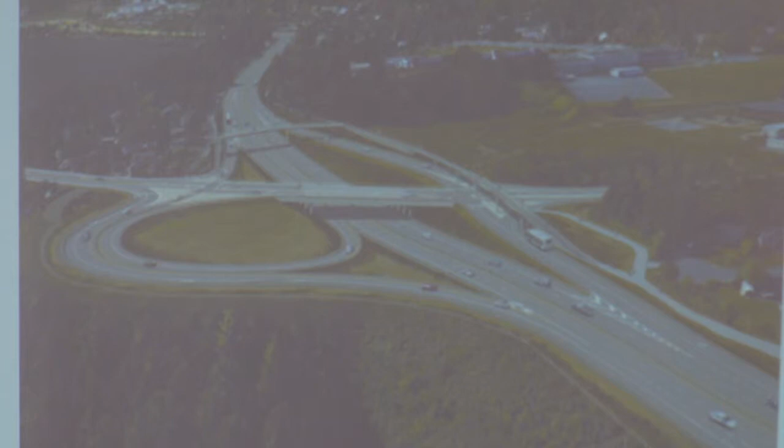So traffic wanting to come down the highway and get onto Mackenzie can come off, can loop around, and head up the peninsula. The difference in this option is folks don't actually need to stop at a traffic signal, wait for a green light, and make that left turn.

From an operational perspective, our team certainly showed from a traffic modeling perspective that both options operate well for that left turn movement. The difference in this option is it's one less light for people coming down the highway heading up the peninsula. So that was sort of a differentiation between the two options.

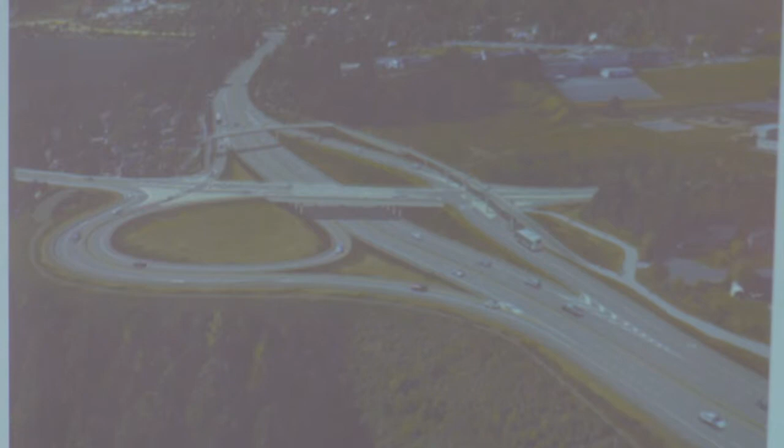And the impact of this option is it does have a bigger footprint on Cuthbert Holmes Park. In this option as well, the Trans-Canada Highway is going under, with Mackenzie and Admiral staying at that same sort of grade that you would see today. So essentially just a structure bridging those two roads.

So our third option was a tight diamond interchange as well, looking at the opportunity for the highway to go over. When we came to our open house in November, our team was still doing geotechnical evaluations, trying to figure out what's feasible, what we can build, how quickly we can build it, and what it means from a preload perspective.

Some of the impacts from this option: it could be visually more attractive to folks, or less attractive, depending on your perspective. The noise implications from something a little bit higher may have a more compounding impact on folks in the community. But it was another option our team was exploring, making sure we could come up with a constructible option from a technical perspective.

To get to our open house in November, and as we continue along the way, there's been a lot of consultation. We know this project is important to the community in the Capital Regional District, and we know folks have a lot of good ideas out there. We're getting great feedback that we're able to incorporate and weave into the progress, really helping refine what's going to be a good project at the end of the day.

So let's list some of the folks we've been consulting with along the way. There are 4 community associations in the area we've been working closely with. We've developed a stakeholder liaison group with all the local governments in the area, the Chamber of Commerce, the Cycling Coalition, RCMP, the school district, ambulance, First Nations, and lots of different folks represented on that committee, ensuring we get a fulsome perspective on the project to make sure we've really hit it out of the park with a good project.

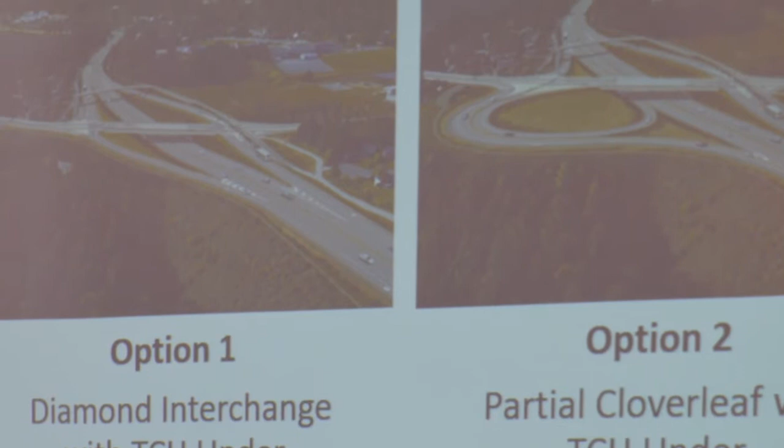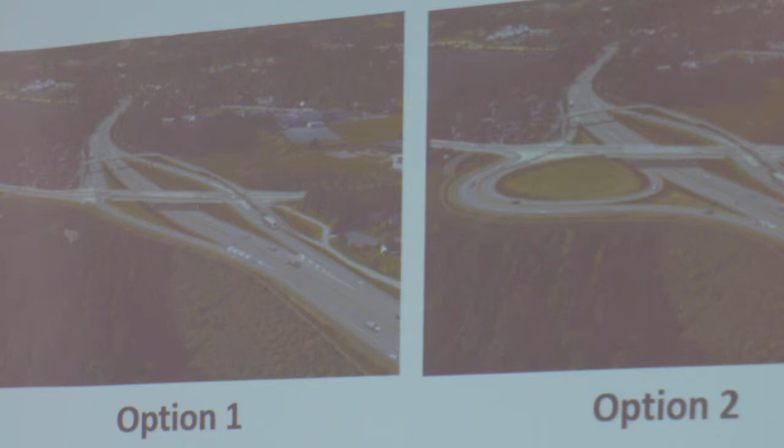We were hearing a lot of interest in the first 2 options, option 1 and option 2, and very, very small interest in option 3 with the highway going over. People just didn't really warm up to that option, and certainly there are some technical challenges with it. So that was kind of interesting to hear that feedback. Of these 2, option 1 and option 2, there was a stronger interest in the Parclo, option 2, from the public.

Certainly one of the primary things we were hearing was about congestion. People want us to address congestion and address it fully - whether that's looking broadly to make sure we look at Tillicum, how's that going to operate down at Tillicum and the Trans-Canada, up at Burnside Mackenzie, how's that going to operate, or just into the future to make sure we build a robust solution that will serve the region well into decades into the future. And certainly a strong message from many people who wrote very large on their feedback: just get on with it. So we'll take that to heart.

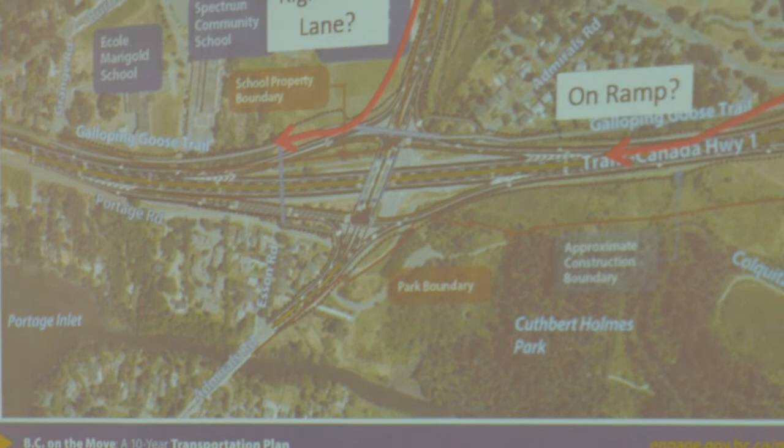In terms of some of the ideas that people gave us, some were very concrete ideas we could use to improve the design. For example, some folks thought we should have a double right turn going down Mackenzie onto the Trans-Canada. They could be small ideas about adding a left or right turn, or even to the extreme of doing a second interchange at that location to deal with some of the issues.

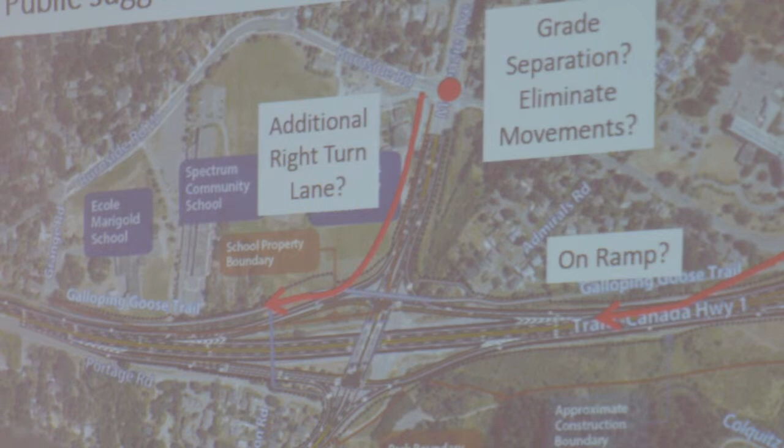Other ideas put forward were an on-ramp down at Burnside. There are lots of people who go under the highway on Interurban or Burnside, take the road up to make the left, fight their way onto Mackenzie, and then onto the Trans-Canada. So some looked at this obvious spot where perhaps we could have an on-ramp coming onto the highway. That's a thought, and one our team is exploring along with many other ideas. We'll be coming back at the next round of open houses with ideas that have merit there.

Certainly lots of feedback on the park. Anytime you're thinking about touching a park, it's a sensitive area, and we need to recognize that and work through those issues. It was interesting—while there were concerns over the park, there was also a fair bit of feedback that people saw it as an opportunity to improve the area, since the part next to the highway wasn't a great part of the park. It was a chance for litter to collect, and people wanted to see us use this opportunity to improve that area, regardless of whether it's the diamond option or the parclo option.

So we've been... I'll go to the next slide. Certainly there are a lot of opportunities there. We've been working closely with the District of Saanich, which manages Cuthbert Holmes Park. We'll be looking at things like exchanging some of our right-of-way for the lands we'll need out of the park, and working through many details about how to mitigate drainage, for example. I think we can vastly improve what we do today, so I'm looking forward to that. We can look at plantings and things to make the area much better. We'll work through that with Saanich—it's an ongoing process.

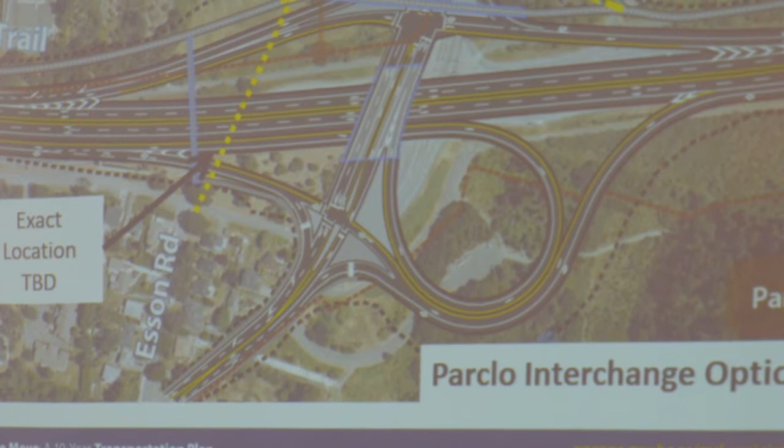So some interesting ideas came back, and we're working through them and refining our design. This is just a couple of examples of things we're considering right now. In the materials shown at the first open house, we had the Galloping Goose path close to the highway. Now we're looking at an alternate arrangement, moving it a little farther up Mackenzie. We do that for various reasons—one is simply cost, since we have a long structure here and can go to a shorter structure up there. Another reason is that for vehicles coming down the highway, their view of this intersection is obscured by the structure, and by moving it up, we can improve that situation. So there are a number of reasons to look at moving it, and we're going through that now.

We're also hearing from the public that they wanted to see more detail around those connections. At the beginning, when you've got three options on the table, we're showing a very high level of detail—that's meant to be the case, just to get into those three options and get people thinking about them.

But there's a need to drill down, and the public remind us of that, down into the detail. They want to see how they get from home onto transit, how they walk from A to B. So we'll take that to heart and bring back more details at this next round.

Here's another one. We have the ped and cycling structure out here that's replacing the current structure around this area. We're looking at moving that closer to the vehicle structure to make it more convenient for all users, rather than going through the intersections here.

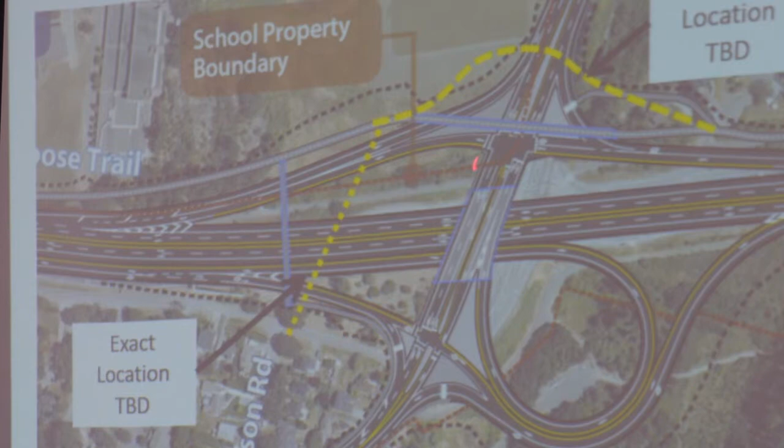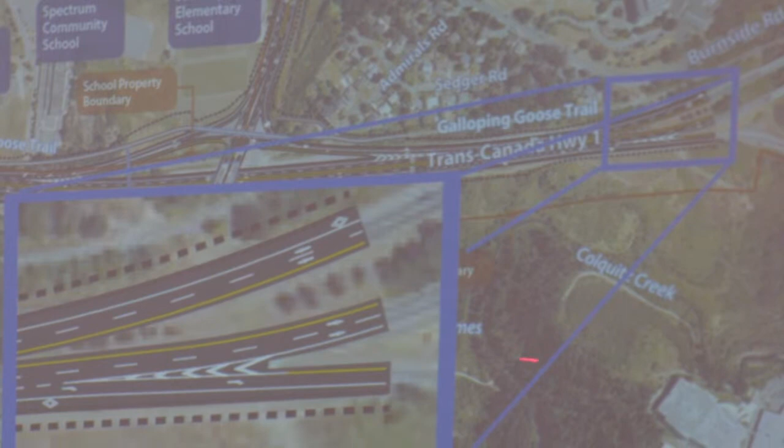Transit, there's a number of things we perhaps didn't highlight well enough at the first open house, and we want to make sure we do this next round. Bus on shoulder is part of the concept regardless of what interchange configuration is chosen. So any congestion, buses can move onto the shoulder and get around it. Something we've done very successfully elsewhere in the province, and we're looking forward to doing that here.

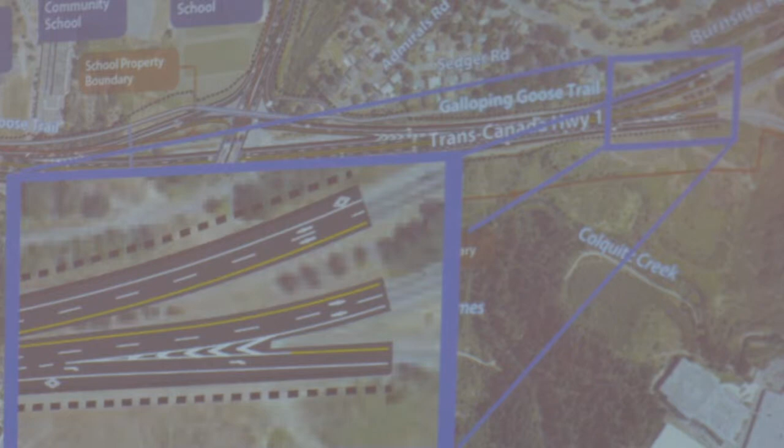I've already spoken about the need to ensure we have a corridor for LRT for the future, and we'll take care of that.

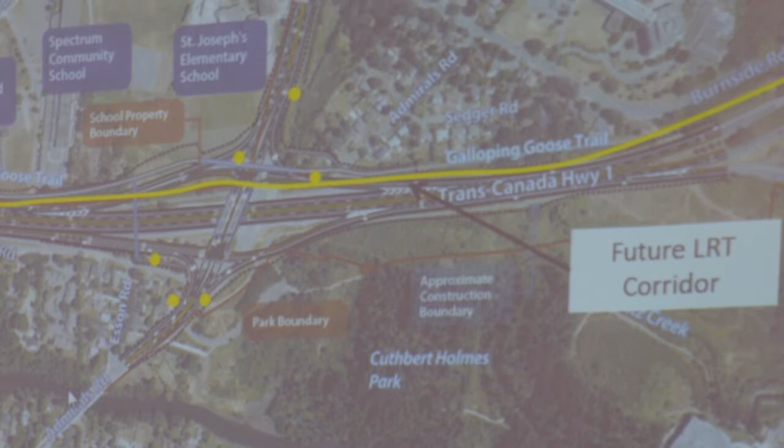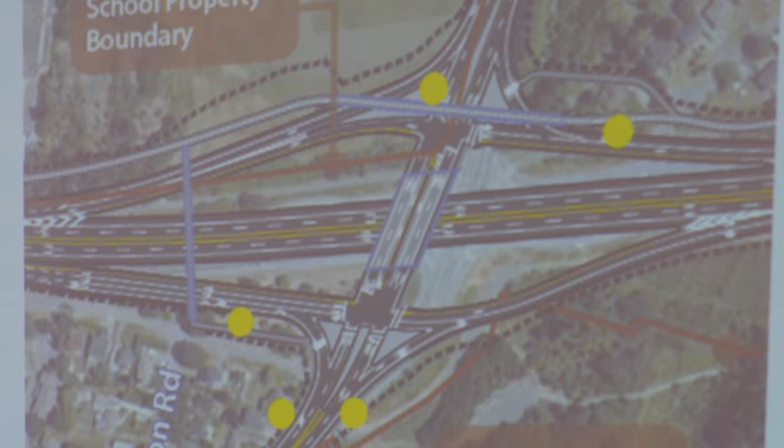I'll go to the next slide to talk about the bus stops, just zooming in a bit. We're working with BC Transit on these details about where the bus stops are, what configuration they'll be, how the public will access them, and working through all that detail.

We heard a lot of neighborhood concerns. Working with the community association has been very valuable to get through them. One was Admiral's Road, ensuring the project doesn't make the situation worse and looking at ways to make it better, to bring speeds down and make it a more community-friendly road. So we're working through that.

The park I've already touched on. As for local streets, anybody living in the area knows there's a lot of shortcutting on streets like Marigold, and this project will absolutely improve that. As traffic flows better on McKenzie, you won't get as many people taking those routes trying to find the shortest way home. Very understandable, and the project will address it.

I know people are quite curious about how we'll do construction, and the good news is the ministry's done a lot of construction and they're good at it. The general scheme is we'll probably do the Galloping Goose first, getting that grade separation done, keeping the Goose in operation the entire time, but keeping pedestrians and cyclists out of the construction area. So that's probably what we'll work on first.

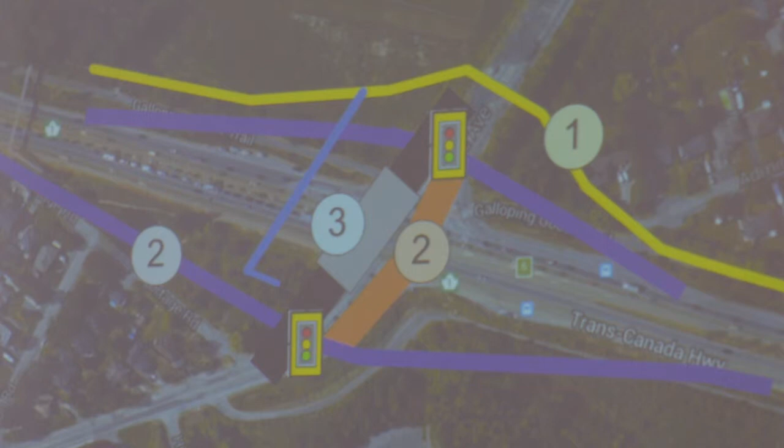Then moving the traffic. Typically on these projects we'll build the ramps first, do a bit of a detour, and get the traffic off the Trans-Canada in this section. That way we're free to work in this area because all the traffic will be going on the ramps. Once the traffic's out of the way, we're able to dig down to get the highway under, and also construct the new structure over here. I think it'll go well. It's a tried and true construction method that we'll be using.

In terms of the project schedule, you can see where we are in the functional design. We went through that engagement period, working through more detailed design, while taking all the engagement and everything we heard and trying to utilize that to make the design better. A lot of times people think you just pick between one option and the other, and that's true, ultimately we have to have a design we're going to build. But within those options there's a lot of detail and detailed feedback that's really useful for us.

I don't know if we've talked about it here, because we've discussed this project in too many forums, but we're anticipating being in construction late this year, and having the project done and open, with all of you good folks driving on it in late 2018.

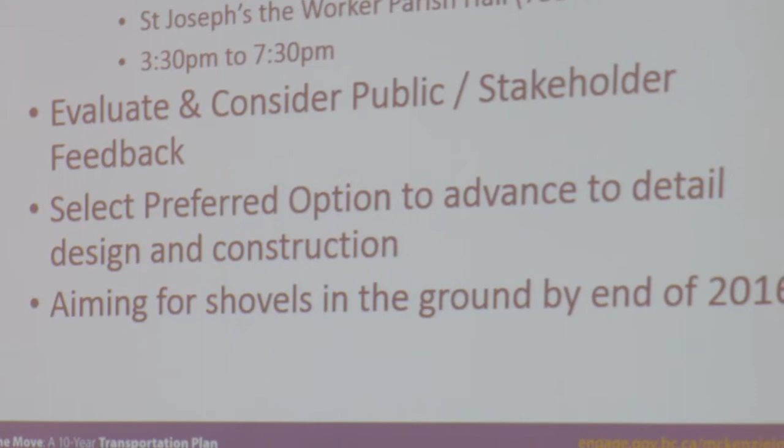From there, we're going to take 3-4 weeks, as long as it takes realistically. It may take months to go through the fulsome feedback we get at this next round of engagement, and see where do we go from here in terms of ultimately making a decision and putting our pens to paper, getting this designed and getting our shovels in the ground by the end of 2016. So we have a lofty road ahead of us, but with the kind of feedback we're getting, we're setting ourselves up well to deliver a great project.

So if anyone has any questions, here's that opportunity. If anyone wants to look at more information on the project, we actually have a dedicated project website. All our materials are on there, from the open house materials to our design concepts. When we have our next round of open house, the design materials will go up live on there as well. So with that, I will open it up for questions.

Should we go to BC Transit first? Oh sure, sorry, we'll go to James Wadsworth instead. We'll do the questions. Sure, that sounds good.

All right, so we're going to talk about developing rapid transit between Victoria and the West Shore. Here's a few transit fun facts for you. The Victoria Regional Transit System is the second largest transit system in British Columbia. We carry over 100,000 people every weekday, so we're pretty busy here. And on Douglas Street, 40% of people traveling on Douglas Street at peak times are in a bus. We're only 3% of the traffic, but we're carrying 40% of the people.

So when you're thinking about how you allocate road space, I think we could use a little bit more space than we have right now. And here's some more fun facts for you.

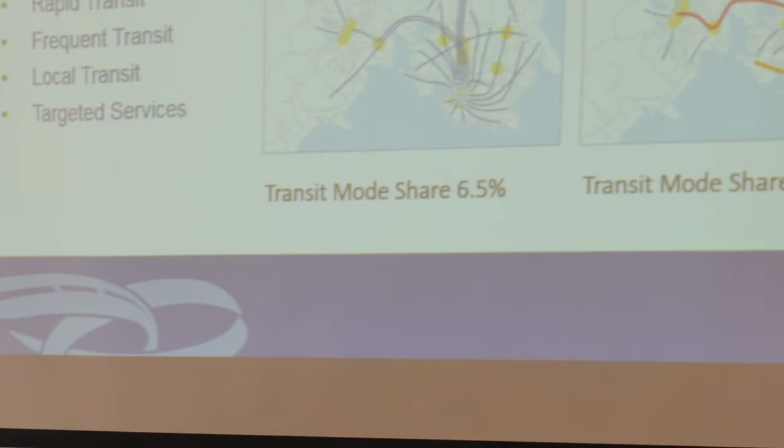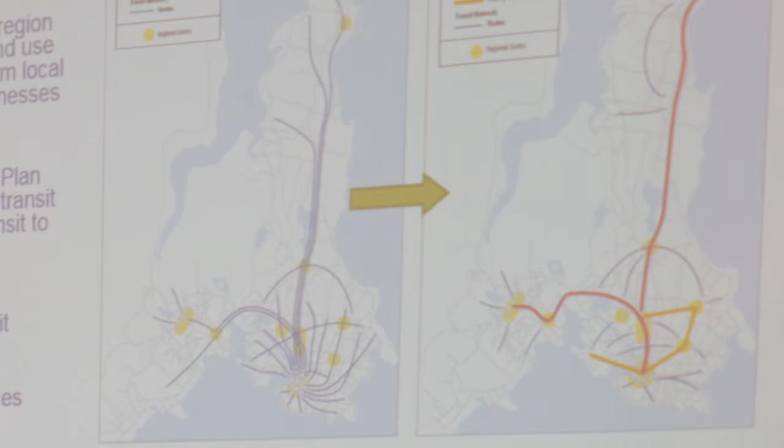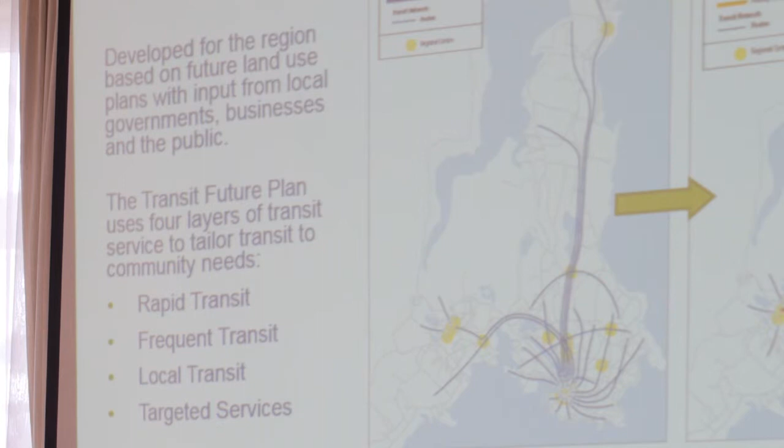What we've done in Victoria is we have a transit future plan that we've worked with local governments on. It's a 25-year plan for transit in the region, and what we're trying to do is double ridership over that time. Right now we've got a transit system where every bus route converges, a lot of it designed on coming right downtown to downtown Victoria. We're trying to streamline that in the future by introducing rapid transit services on a few of those corridors and frequent transit services on our major corridors. By doing these things, we're hoping to double the number of people taking transit.

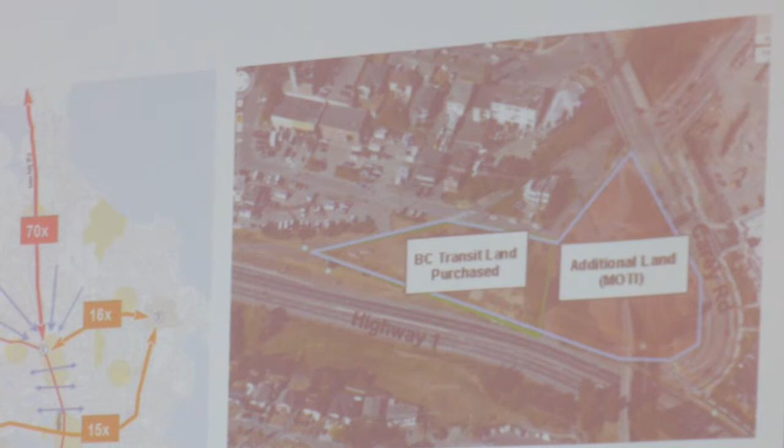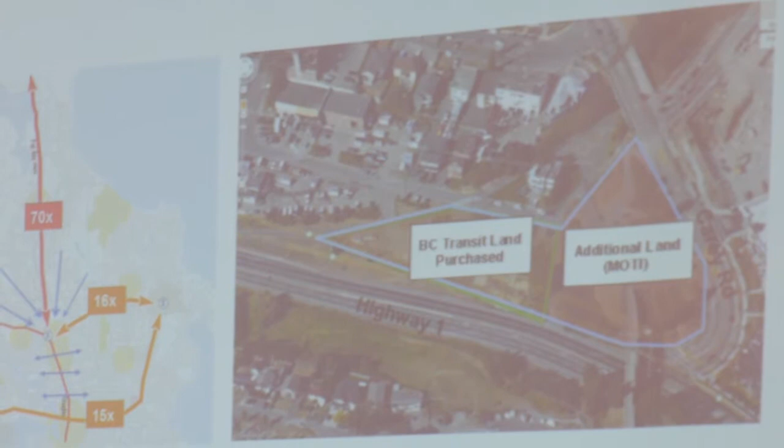Here's just a few more details on it. We're looking at a rapid transit line to the West Shore, of course, and we're also looking at rapid bus lines that connect Esquimalt up through downtown Victoria to UVic, a rapid bus line on Mackenzie, and a rapid bus line out to the West Shore.

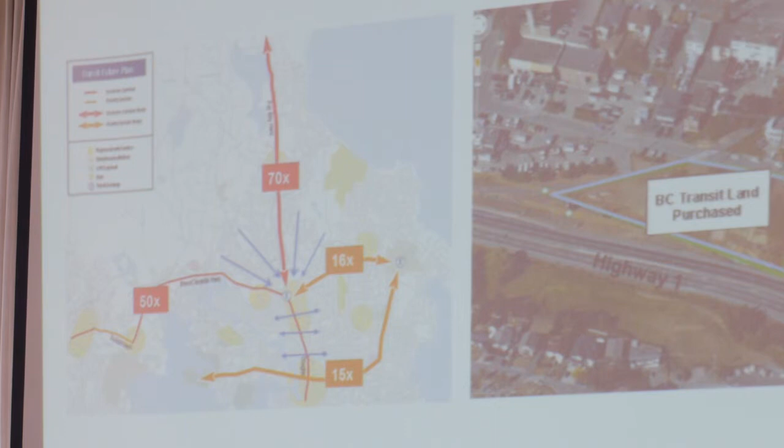And then for our other services, instead of sending them all downtown, we'd start to make more of a grid system out of it. We'd have crosstown routes, and you'd come out to Douglas and make a transfer there. And north of that, at Uptown, we'd build a transit exchange that would act like a hub.

So routes from the north would come in just like a spoke on a bicycle wheel. Right now we're holding some properties, and the ministry's holding some properties that we could use as a future exchange. We'd have to work with Saanich on how that would be configured in this area. It's also going to take some major investments in the highway and on local roads to make access and egress from that site work.

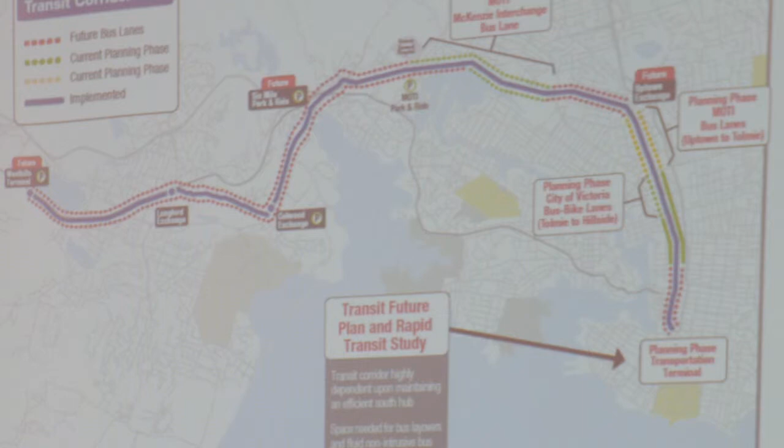We've also done a lot of work looking at a rapid transit line to the West Shore. In 2010, we did a study that identified this as the preferred rapid transit corridor connecting downtown Victoria with the West Shore. It's on Douglas Street out to Uptown, then parallels the highway, and then Island Highway, possibly in the future all the way out to West Hills. This aligns with local land use plans we've seen in Langford, Colwood, Saanich, and Victoria.

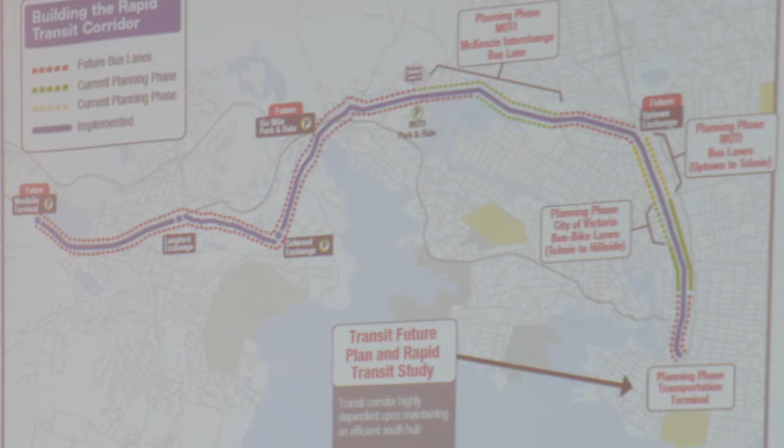We've made some progress to date in terms of planning. I think Janelle and Dave covered what's happening with bus on shoulder lanes out in the West Shore, but we've been working closely with the City of Victoria on introducing bus lanes here. I'll talk a little bit more about that in a second. We're also looking with the ministry at adding bus lanes between Tolmie and Uptown, which is part of Douglas Street, under their jurisdiction.

So these were the goals that we had for the rapid transit project. We're trying to improve the on-time performance of our transit system right now. Bus routes' travel times are really variable. Sometimes it can take 15 minutes to go down Douglas Street, and sometimes it can take 23 minutes, and that's a really hard thing to schedule and ensure that you're using resources well. We're hoping to improve travel times.

We talked about the mode share gains we're trying to get and aligning with future land use plans. Today it takes an additional 20 minutes from the West Shore for people to get in by bus than by car. We're hoping that if we introduce bus lanes we can even up that time, so it should take about the same amount of time. And if we were to look at rapid transit from the West Shore in the future, we're hoping transit travel times will be better than auto times, and those are all things that make it more likely that people will get out of their cars and into a transit bus.

Other communities that have done this have seen, within the first couple of years, a 30% growth in transit ridership on bus rapid transit systems.

Here are a few fun facts about Douglas Street. It's been identified in all local government plans as the corridor for future rapid transit. 35% of the employment in the region is along this corridor, so when you're thinking about where to make investments in transit, it's along this corridor. We touched on that 40% number of people traveling by bus, but that's 18 to 20,000 people a day moving on the corridor in transit. That's a lot of people.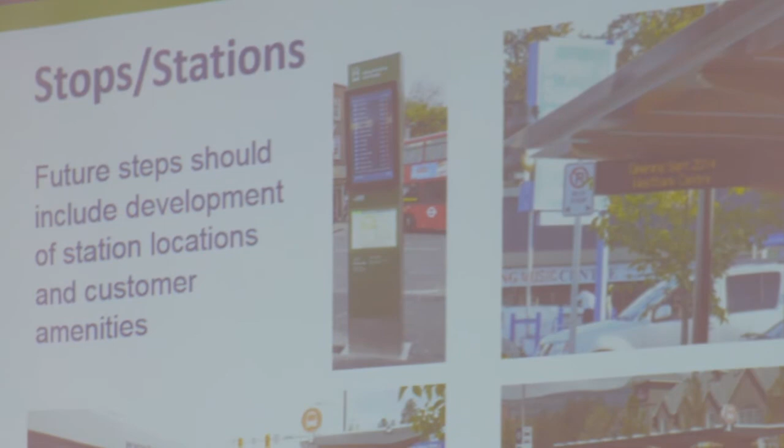Other things that we'd like to do coming up are we'd like to start to make our bus stops look more like bus stations. These are a couple pictures of the bus stations that we have in Kelowna, where we've successfully implemented a rapid bus network there. They're of a higher quality. The boarding on the sidewalk is more level than our existing ones. We also have real-time information, so it counts down when the next bus is coming. So those are all things that we're looking at in the region here.